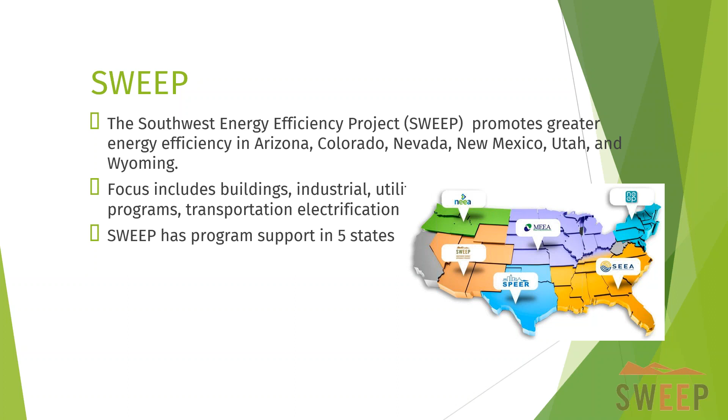We're one of 6 REEOs, Regional Energy Efficiency Organizations. There's one almost everywhere across the U.S. You can see a picture of where we're at. SWEEP's on the lower west to southwest side of that map.

So we're going to talk about these points in the 2021 today, and each of these could have their own webinar—a full hour, if not more, for some of these topics. Like the ERI—there was just one from ResNet, and Ryan Meres at RESNET just had a webinar discussing the ERI in the 2021. So there will be ongoing webinars from all kinds of different sources and industry as the 2021 code gets closer to being released.

Okay, we're going to start with the envelope changes. This is the 2018 prescriptive table. And I'm showing this prescriptive table—we know there's other pathways. This is just the R-value table, if you think of it that way.

It's easy for us to think of an R20 or R13 versus looking at a U value number. So I'm not going to show that table, but it aligns with the R value table. Then there's the performance path that uses the table, and the ERI has its own pathway, but it looks at this table to verify it reaches a certain level of efficiency. So this is the 2018 code.

I'm going to show you the 2021 version. What happened in a lot of the code change proposals, as Mike said, I was on the committee, and there were over 300 proposals that came through to add clarity, to make the code easier to comply with from both the builder, the trade, and the building official.

So a lot of clarifying language. In the second bullet, in the prescriptive table, we had a 13 plus 5. If we look at climate zone 3, where Las Vegas and Clark County are located, we had a 13 plus 5 in the wood frame wall. In the new code, it'll just be 13 and 5, since there was confusion about the plus sign.

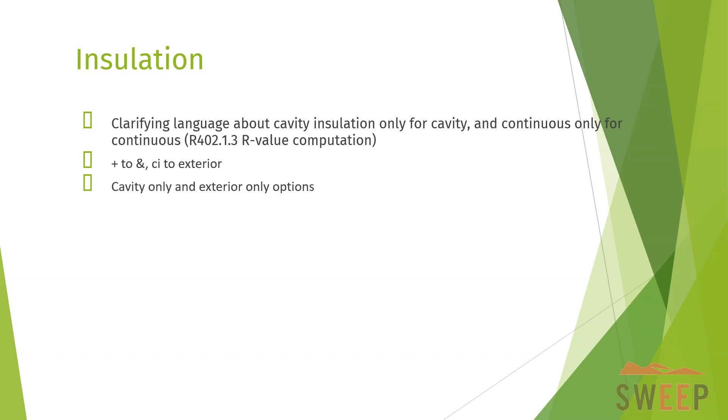For that 5, there'll be a CI acronym, meaning continuous insulation. That acronym's been used for years in the commercial energy code. There are also other options for cavity-only and exterior-only insulation, depending on the climate zone.

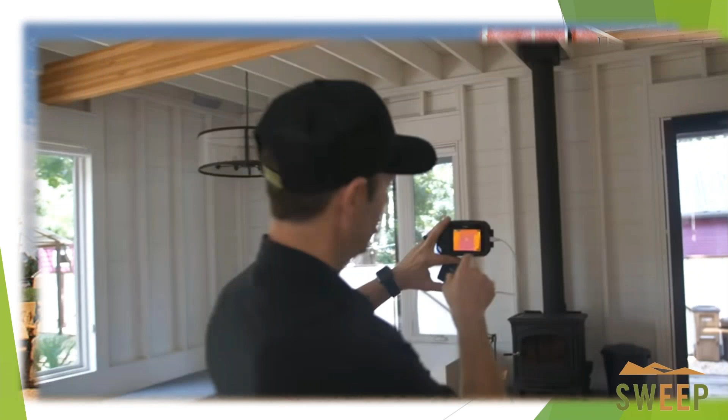Here I took a screen capture from Matt Risinger's YouTube channel, showing a house that meets the energy code with all insulation on the exterior. It could have been built that way in past codes using the trade-off approach, the ERI, or the performance path.

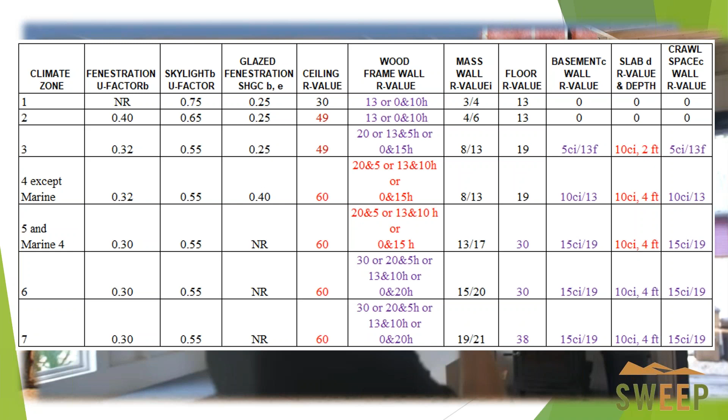In the floor value, those values were in the last code. What happened here is there was a footnote in climate zone 5, 6, and 7 that said if you could not fit that insulation value for the floor within that cavity, you could use an R19. The proposal was submitted to strike that footnote, and through the online governmental vote, it was supported and removed. Again, this is preliminary, but we think this is very close to what it will look like. That's what the change was in the floor values.

I'll just pass this, we already talked about ceiling insulation. So on windows, there were some changes there. Fenestration numbers came down to a 0.30 from a 0.32. We were at 0.32 in the 2018 code.

The proponents that submitted these proposals listed the penetration of the window products that are available, and it showed that these fenestration U values of 0.30 are definitely doable.

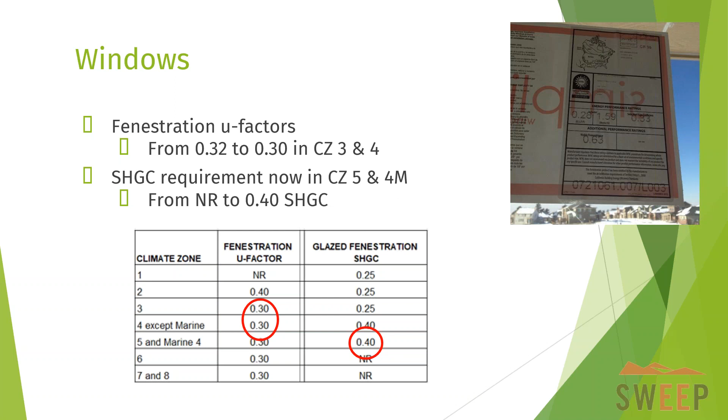As the U factor comes down, the solar heat gain coefficient has been coming down too, so that's not an issue. I reside in climate zone 5, the Denver market, and we're seeing below 0.40 SHGC on standard windows going into residential.

Next, there's the area weighted average that comes up for windows, and this comes into play if there is the trade-off pathway. Think of Res Check, or the performance pathway, or the ERI pathway — on this one it's just the performance pathway. What it was, the maximum U factors were higher, so you could trade and get your average maximum U factor higher.

In this code, 2021, it would be dropping them. Climate zone 4 and 5 dropped down to a 0.40 — it was a 0.48 for that weighted average maximum value. Climate zone 6 through 8 was a 0.40. So that's where they came down, where the efficiency in this code change proposal came in and was approved by the online governmental vote.

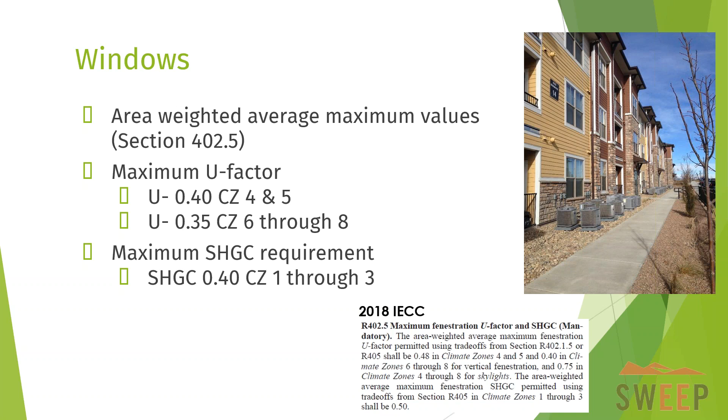And then SHGC also has a maximum weighted average, and that came down. It used to be 0.50 in the 2018 code, so that's come down to 0.40.

Other changes that happen with fenestration in windows is there are some changes if you're at elevation, above 4,000 feet. I'm in Denver, Mile High City, over 5,000 feet. What happens is you don't then have to align with the prescriptive 0.30 value — you can go up to the 0.32, which aligns with 2018. That's for elevation. So there are some climates at the same climate zone as Denver, but not at that elevation, which would be required for the 0.30 prescriptively, while climates above 4,000 foot elevation would be able to move to the 0.32.

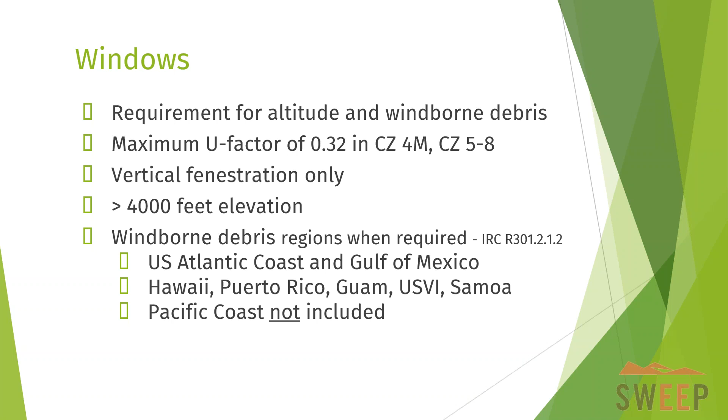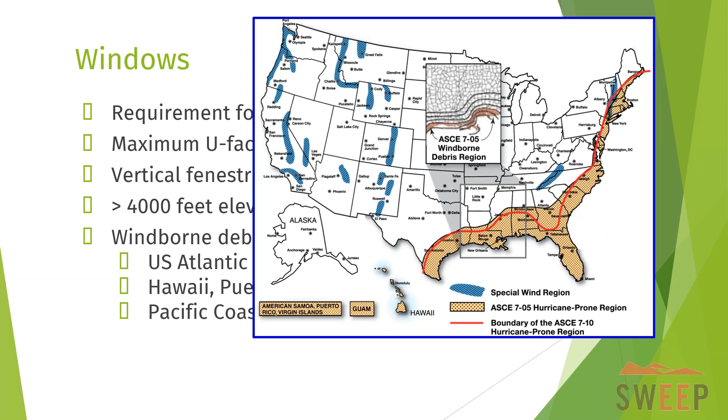Also the islands, whether in the Caribbean or the Pacific, those also fall under the hurricane-prone region. So this is a new addition to the code, and it provides the opportunity for windows to be installed — usually around windows being able to support the hurricane requirements or wind requirements that are more challenged with the lower U factors.

Air barrier and testing is the next item we're going to talk about today. There were many proposed changes to this table. This table came into the code in the 2009 IECC, after the Energy Star thermal bypass checklist that had come out a few years before. So it's somewhat of a checklist, and about 80% of the proposals were submitted by energy raters.

The energy raters presented this as being used as a checklist, a guide. The committee was saying the code is not a guide, the code is not a checklist, but this table is providing clarification and guidance, and the raters are using this as guidance, and the trades are learning of their requirements from this table.

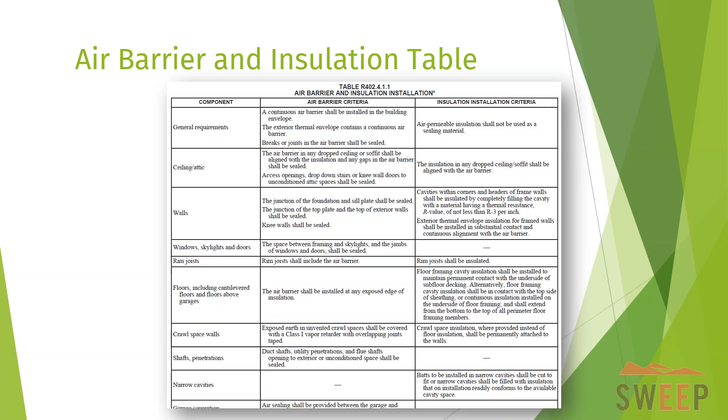So not major changes from an efficiency or technical perspective, but clarifying this table for use by the industry. Here's an example, just some simple, struck out a sentence that was redundant under the air barrier for general requirements. And then here's another example.

There was no air barrier criteria for plumbing, but this was an area where the raters thought there should be information: holes created by wiring, plumbing, or other obstructions need to be air sealed. The committee and the online governmental vote supported it. There's also, on the right side of that table, the insulation requirement. There was no requirement there, or they modified the requirement for plumbing and wiring to align with their air sealing.

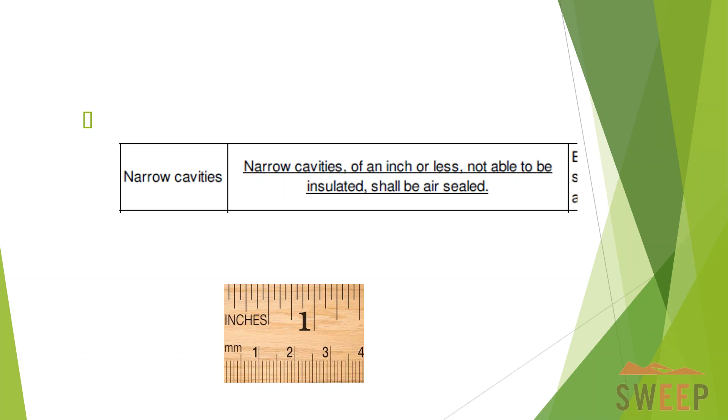So it adds criteria, but it's really there for clarity. I'll just go through some of these pictures. Here's one always question: narrow cavities. This was added for narrow cavities. If you have a narrow cavity of 1 inch or less, and you're not able to insulate, you air seal it. Think about the cavities around the windows, that's really where it's going to be. And that was supported by the committee and everybody that came through after that.

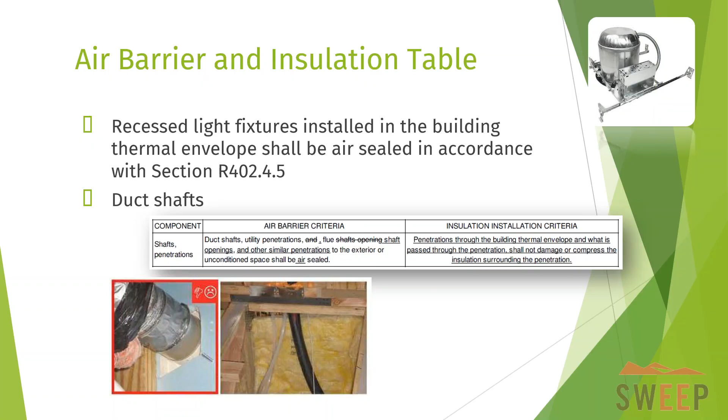Ongoing with this table, I'm just showing you some high-level ones: air barrier for duct shafts and recessed lighting, adding clarity. When the final version comes out, take a look at the table, see what was added. In the code, you'll see the change bars on the right side. Take a look and see where the change bars are located and see what's now in the code. The underline is the language that was added, and the strike through is the language currently in the code being stricken. That's how the proposal looks, and that's how the committee received and reviewed it.

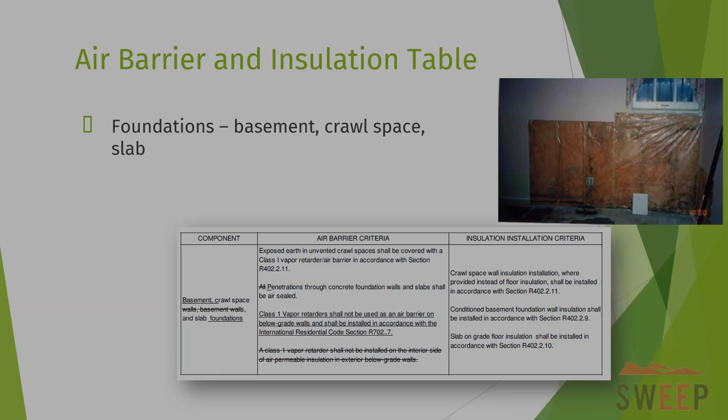The other big one is leakage. We had the insulation, and we just talked about the air barrier and insulation table. This is a new one: leakage. There's a number of changes here, and I think everybody is going to like them.

The builders and the raters appreciated what's coming into the code. There's a new definition: dwelling unit enclosure area. The reason for this is because of attached units, whether they're attached townhomes or stacked. There's been a challenge to reach the air change per hour requirements in the air leakage testing area of the code, and dwelling unit enclosure area fits for those attached units, especially stacked units. That's in the definition.

Then on the air leakage side, for these kinds of units, you're going to be able to use this other acceptable pathway. You can still use ACH, but this is an acceptable alternative. Now the air leakage can be measured at CFM per square foot, which aligns with the dwelling unit enclosure area - your ceilings, floors, and walls. And now you just have to be better than 0.30 CFM per square foot.

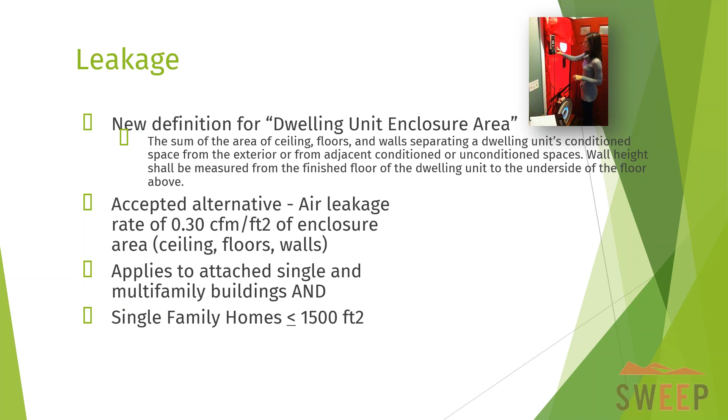It applies to stacked, attached units, and it also applies to single family detached. The rating community and builders have said this is a challenge when building smaller units to hit those numbers because the volume's not there, and the greater the volume in a home, the easier it is to get to the ACH numbers. So small, detached, single family also qualifies. This is a conditioned area.

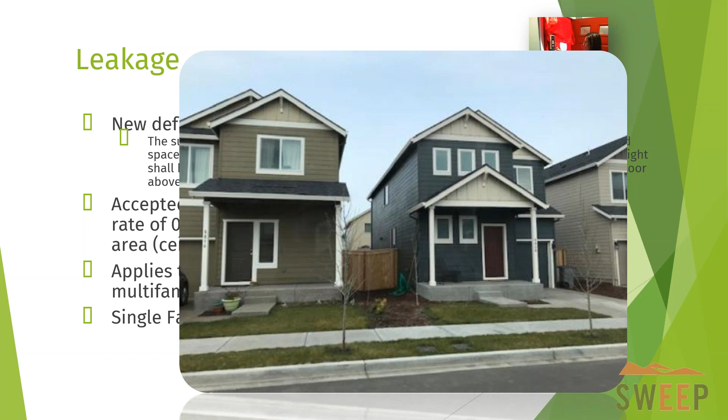Okay, and then we continue on multifamily. So over the years, the RESNET Multifamily Committee has been working on the challenges of testing multifamily and complying with RESNET with multifamily. Committee members from that committee were very active in participating and proposing changes to the 2021 code. And so now with multifamily, some of that has moved in, and this could be a whole other webinar just on multifamily and the leakage in multifamily, because there's a lot of great information. So it's really multi-zone testing, single zone. There's a lot of opportunities that are there that weren't in the code before.

And then, of course, you have your individual dwelling units with the multifamily. The other thing I wanted to mention is, it might seem minor, but the numeric ACH, the way the code has been written, it said 3 ACH, 5 ACH, but it was spelled out as a word. So there was interpretation of what that meant. If a report came back at 3.2 numerically, was that a 3? If it came back at 5.2, was that a 5? And so the code now says 3 is 3.0, 5 is 5.0. So going from a word to a numeric, that's a change. That should add clarity.

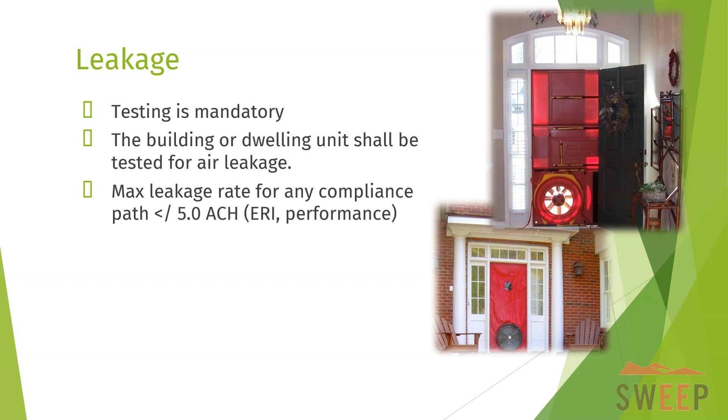Ongoing with leakage, testing has been mandatory in the code now for a couple cycles, so the building or dwelling units shall be tested for air leakage. That's now in the code, dwelling units. And what was not in the code before is if you did a different pathway, if you did an ERI or a performance pathway, there wasn't a limit on what leakage you could have in that residential unit. Now it says 5 ACH or less is the max air leakage you could have to qualify for the code with the ERI pathway or the performance pathway. Prescriptive, you're going to fall under the other ACH we just showed in the previous slide. But with these two pathways, you now have to max out at 5 ACH for the software to come back and say, yep, it met the code, either ERI or performance.

Okay, so system changes. We'll jump into the system, starting with duct testing, which kind of leads up to leakage. Like I was just mentioning, there wasn't a limit on air leakage if you used the two performance pathways. Well, now it's similar - you shall not exceed 8.0 CFM. No matter what other pathway you're using, that's your limit for duct leakage.

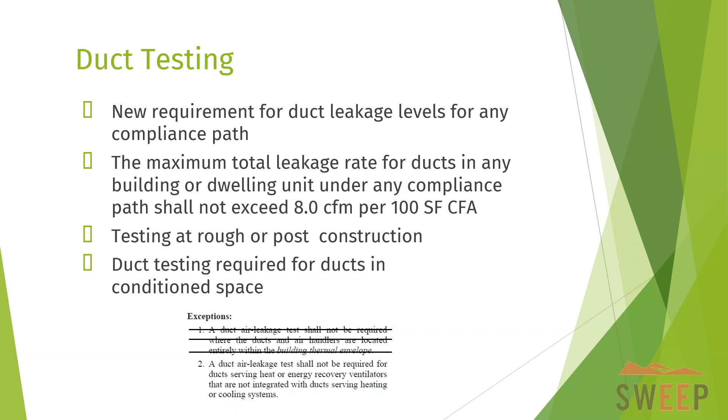Testing still occurs at rough-in or post-construction. The one change that has come in, and probably a controversy when the 2021 code comes around for adoption, is this exception. Exception 1 in the 2018 code and the 2015 code exempted duct leakage testing for ducts that were in conditioned space. With that exception being removed, now duct testing is required in conditioned space. Exception number 2 becomes exception number 1, but it's not in a specific section of the code - it's just the exception is deleted. So the interpretation, because it says ducts shall be tested, now ducts are required to be tested in conditioned space.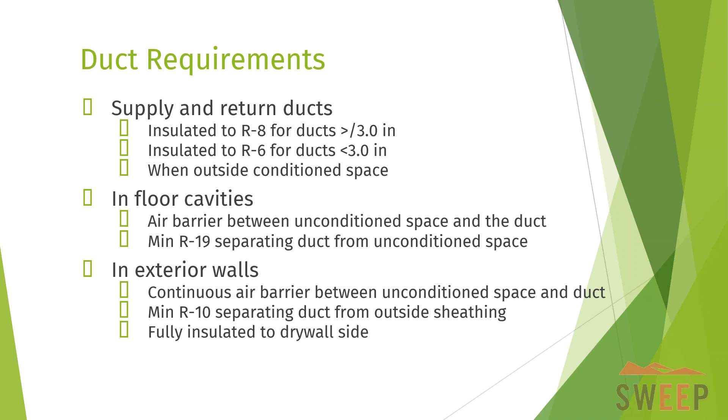Okay, so then we'll continue on with ducts. They've got different insulation values depending upon the duct size. When they're outside conditioned space, there's some new requirements that came in for floors and walls. Here's an example I pulled from the proponent's reason statement. In this example, you have to have the air barrier between the unconditioned space and the duct, and you have to have a separation, at least R19, between that duct and the unconditioned space. So that's something that'll need to be addressed in floor cavities.

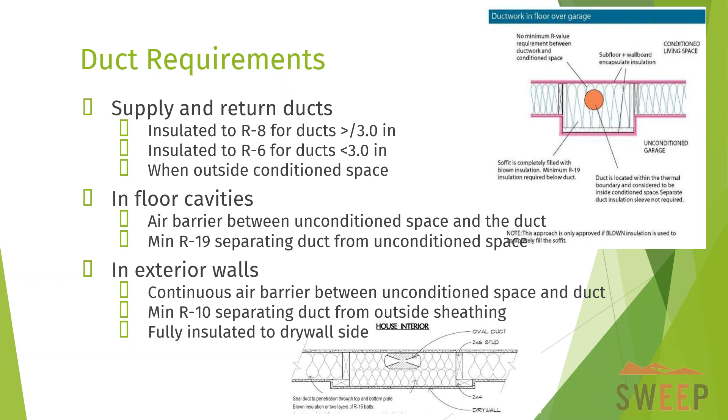I've seen this for years here in the Denver market where I'm located, where builders, where ducts are going in floors above garages, they're framing down and increasing that duct insulation between the air barrier, the drywall, and the duct. And so that's now in the code, will be in the code. For exterior walls, it's similar - you're going to have your air barrier between your unconditioned space and your duct, and then you have to have a minimum of R10 between your duct and your outside sheathing. So those are new requirements in the 2021 that weren't there in the past. The building science industry has talked about this for years, having enough insulation on the outside between the conditioned space and the unconditioned space and the ducts, but now it's in the code for 2021.

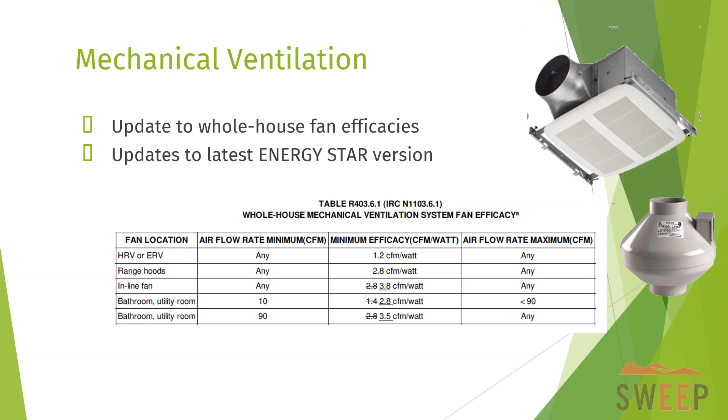Also, this is a new addition to that table I was just showing, for when the air handler is being used with the HVAC equipment. Now there's a minimum efficacy requirement that will be listed in the table, which wasn't there in the past, in addition to the other fan types.

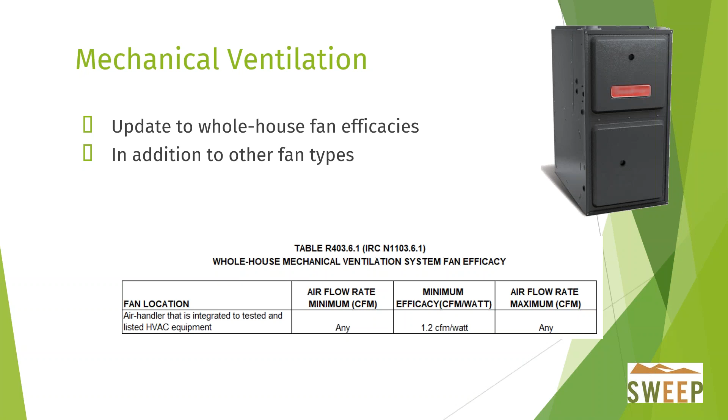Continuing with mechanical ventilation, in climate zones 7 and 8, an ERV or HRV is required. Not in the warmer climates, just in the cold climates of 7 and 8. It must be balanced, and it has a sensible heat recovery efficiency requirement for the units.

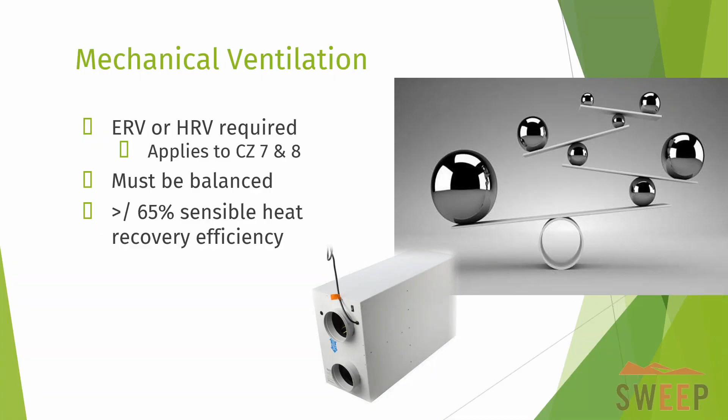Continuing with mechanical ventilation, there's some additional information in the code about testing, and like other sections of the code, it will list examples of air barriers and sealing. This is talking about ventilation and flow rates using a flow hood, a box, a flow grid, and so forth. That's new. The last bullet talks about a written report being submitted to the building official.

The commercial code has had commissioning in it for 4 cycles now since 2012, and they've had to submit a commissioning report to the building official. That's all they had to do. They didn't have to have it approved, and they didn't have to go through any specific review, just submit it.

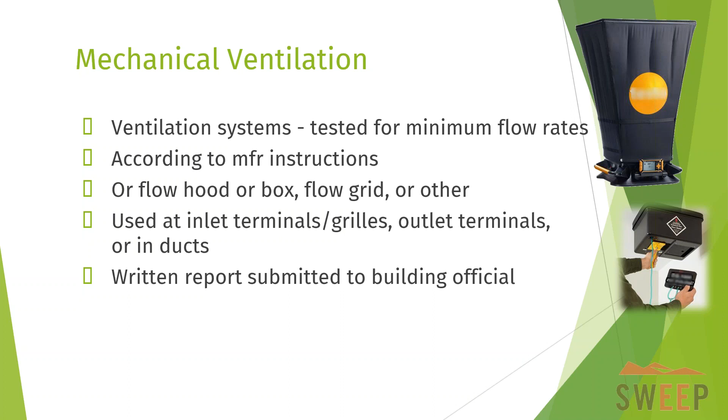This is similar. I would imagine there could be some interpretation at local levels, local municipalities, but just the written report needs to be submitted to the building official. It doesn't say it has to be approved, so that'll be new to the code. I don't think anybody is really pushing back on that with the appeal Mike mentioned earlier at the beginning of the webinar.

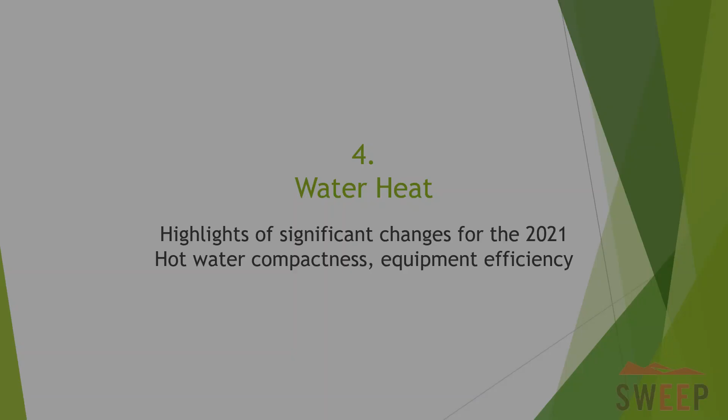So, water heat. There are some new requirements in the code, and first I'm going to talk about compactness of hot water. You're saying, what on earth is compactness of hot water? Well, this is a calculation done in software, and it aligns with ERI, though it's not identical to what's in the ERI.

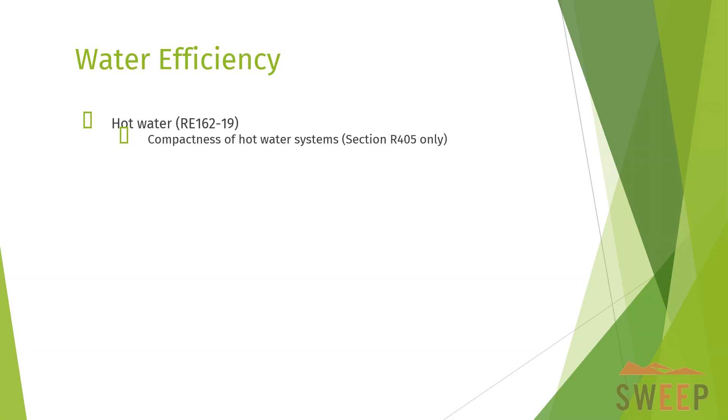Looking at the hot water systems, it examines the hot water area by area in that conditioned space, looking at wet rooms, faucets, and so forth, and where the hot water heater is located. This only applies to the performance path, that's R405, not prescriptive, not REScheck, not UA trade-off, not ERI, but the 405 pathway.

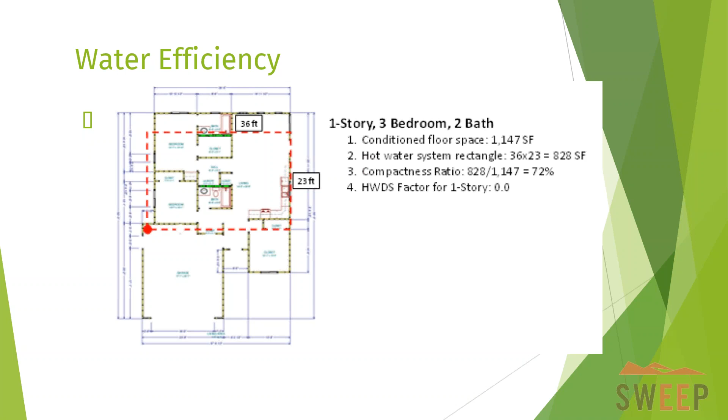This goes into the software to do the calculation, but this information needs to be put on the plan: what's the conditioned floor space, what is the hot water system, is it a rectangle? You're not going to have to do a triangle or rhombus, just a rectangle, and you're going to come up with a compactness ratio.

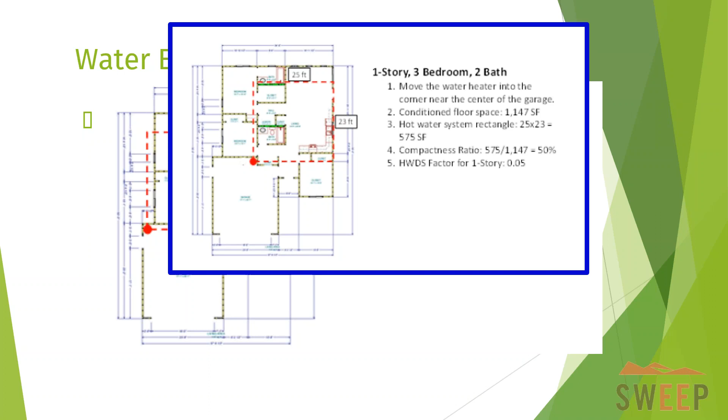But this information, going back to this diagram, needs to be on the plans. It shall be on the plans, and it's only for the performance path, R405, recognizing this is being done in ERI and HERS, in addition to the performance path, to gain efficiency in hot water. So it's looking at the sources, hot water heaters, loops, whatever. If you've got heat trace pipe, that would be part of that rectangle.

Any of your termination points, your faucets shown on the plans. If you have more than one water heater in a larger home, then you'd have 2 rectangles, because each water heater would be servicing a different plumbing source.

If the water heater is included in the basement, that's counted. So going back to the table, you're going to get your compact ratio, and it's going to be even smaller because you'll have more area with the basement. But this hot water distribution system factor will go into the software, so the rater doing the performance path would have to enter that information, and the software would then calculate it.

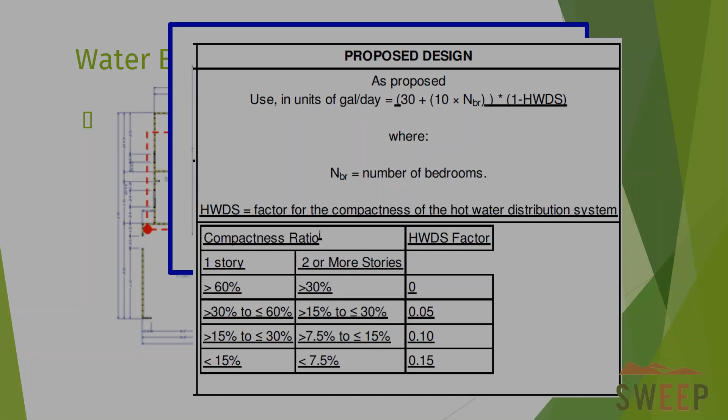This is part of the code. Next thing is water heat, and this is prescriptive. This came into the code - I don't remember if the committee voted this unanimously or whether it failed just barely, but it went through the rest of the voting process. The online governmental vote of ICC members did approve this, and this is for the prescriptive pathway.

Any of these can be chosen. There's not a conflict with the NAECA requirements for efficiency - it's not going beyond NAECA, because they can choose any of these. So you're not limited to a tankless system or electric water heat. You have multiple options that you could choose from.

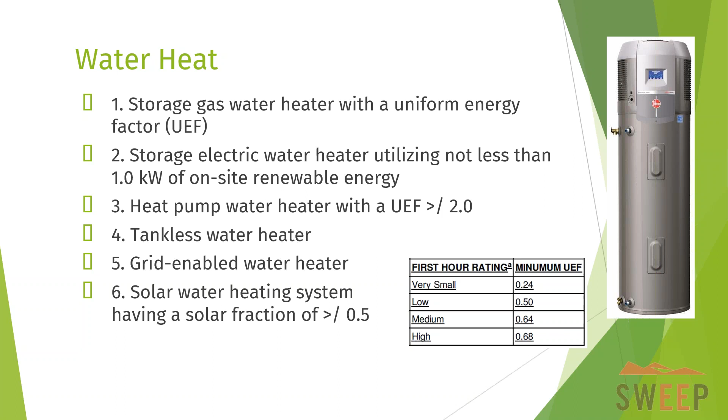Solar - on items 5 and 6, there's new definitions being added to the code for grid enabled. What is that? So solar fraction, what is that? That's new definitions that'll be added to the code describing those, and that's prescriptive. Jumping into lighting, I'm going to move a little quicker.

So lighting controls and efficacy. On the efficacy, the values that are in the 2018 Energy Code came into the code in 2009, so it hadn't been updated in years. In the 2009 code, it had a different lumens per watt based on the size of the bulb - whether it was greater than 40 watts, or 15 to 40 watts, and so forth.

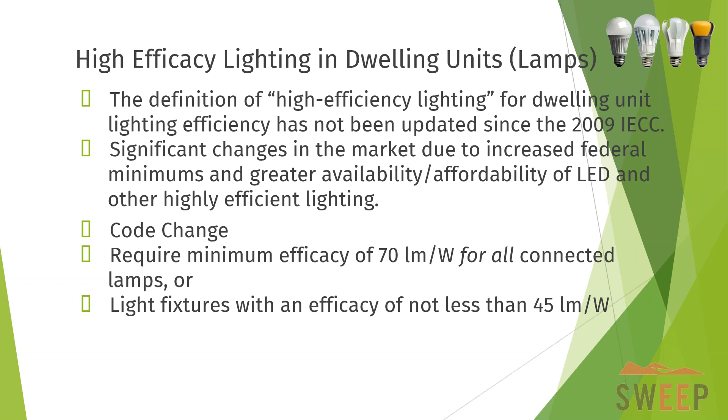This is for, yeah, and so it aligns with the federal minimums that have been going up, and states have been increasing their requirements.

Also, controls. Controls have been in the commercial code for many cycles, and now some controls are being added to residential. So a dimmer is considered a control, occupancy sensors considered a control. Other controls could be used - the industry is always coming out with something new, so it leaves that flexibility for other.

You have exceptions there, bathrooms and hallways. You don't want an occupancy sensor going off when you're in the bathroom, definitely not in commercial restrooms. So safety and security always trump the energy code, and so any lighting for safety and security is exempted.

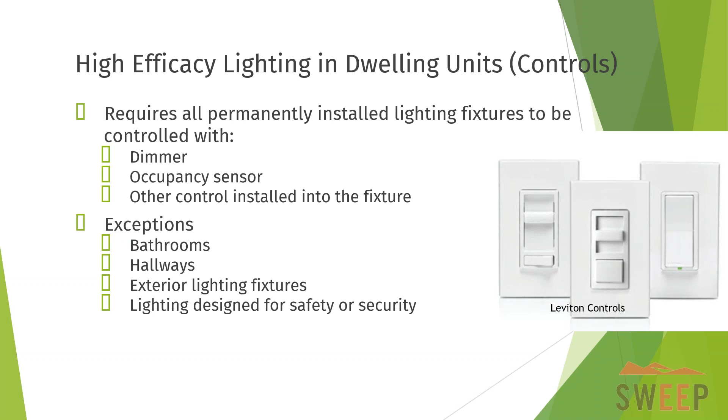So where it will come into play is multifamily residential. This picture here, 3 stories - this building, the energy code complies with the residential energy code. If it was 4 stories, it would have needed to comply with the commercial energy code. The commercial energy code already has all the lighting requirements and the exterior lighting requirements, but on the residential side, it didn't.

Now there are requirements in the codes for safety, and those have been there in the exterior lighting requirements, but from an efficiency perspective, they've not been there. So these are new - maximum watts per square foot, lighting controls, with 1 to 2 family dwellings as an exception. It has a max wattage, and you're really not going to hit that wattage unless maybe you have a 7,000 square foot single family home. On a typical single family home or attached townhouse, you're not going to hit those levels, so the exterior lighting requirements are really going to apply for this type of building - multifamily, 3 stories or less.

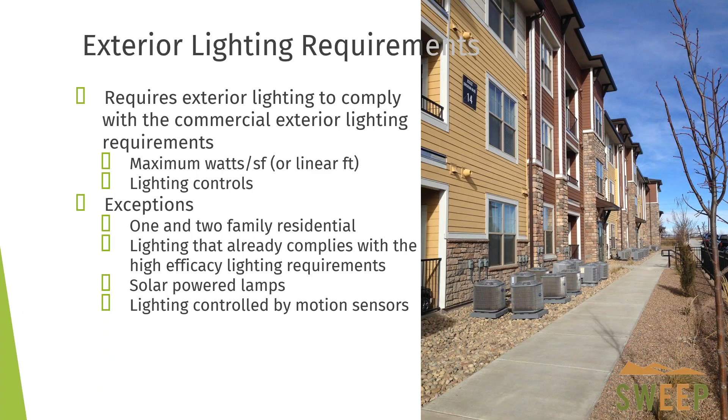Okay, electric vehicles. I'm watching my time, I'm moving.

Electric vehicles - so over the last 3 years, from coast to coast, we've seen municipalities adding requirements for electric vehicle infrastructure into the building codes, as the electric vehicle industry is growing, and the primary place for charging is overnight at one's residence.

This only applies to new construction. There are cities - Atlanta, of course the West Coast, and here in the Denver market, Denver brought in requirements 3 years ago. But at that time it was just the infrastructure - you either put in a wire or a conduit. So builders have been putting in conduits for the last few years.

Denver, with the 2018 code they just adopted, took language from the 2021 code and moved it into their 2018 code. So for 1 and 2 family dwellings and townhomes - residential - you must have an EV-ready space. There's a definition for EV-ready space.

You're going to be wired, you're going to be at your panel, and you're going to have an outlet at your parking space. That's an EV-ready space - it's ready for the EV.

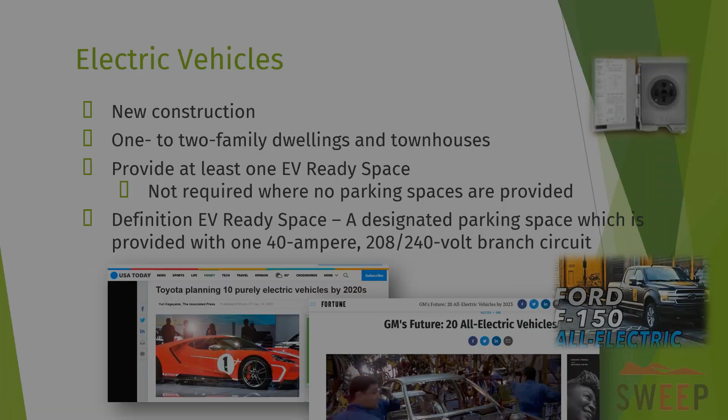This also applies to multifamily new construction, and in that case there is a matrix. You'll see this matrix over in the commercial side - the commercial committee approved it on the commercial code for the 2021 IECC.

I'm seeing communities in the Southwest where I work - Flagstaff, Sedona - small communities adding EV infrastructure and EV readiness requirements. It's pretty interesting to see what's happening in that space.

There's a new definition, EV capable - basically you've got your raceways or conduit. It's capable, you just have to then wire it, hook it to the panel, have your outlet, and so forth. So there's ready and there's capable, with different requirements for EV ready and EV capable. That's in multifamily.

So, doing good on time - I'm talking fast and my voice is holding out.

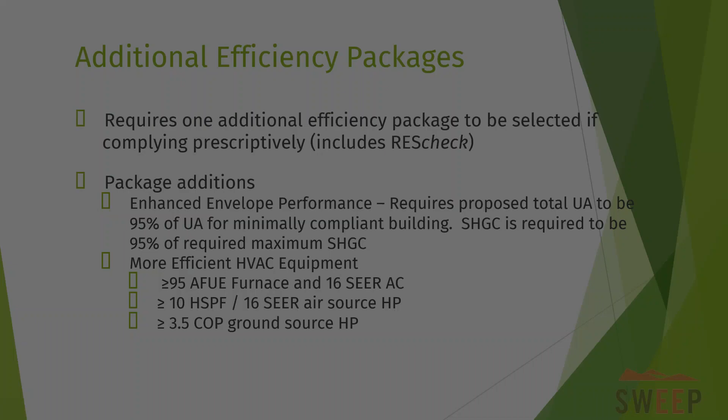Efficiency packages - I'm going to talk again about the commercial code, and I know they're not the same. A single family residential, condominium, or townhouse is different than an office building, lodging structure, or retail building. They are different. But on the commercial side, they've had additional efficiency packages for years, in section C406 of the commercial code.

The commercial code says you do these things - you could do the performance path, the prescriptive path, or your trade-off path - and you choose an efficiency package. One of these options, you choose that.

There were a number of proposals that came in, and one was approved through the online governmental vote. I believe this was NBI's, New Buildings Institute's, proposal that came through. If it wasn't, I apologize, but I think it was this one.

They have additional efficiency packages - again, you're going to do the code requirements, and then you're going to choose from this list. A couple people have called these the flex packages, but it's additional efficiency packages.

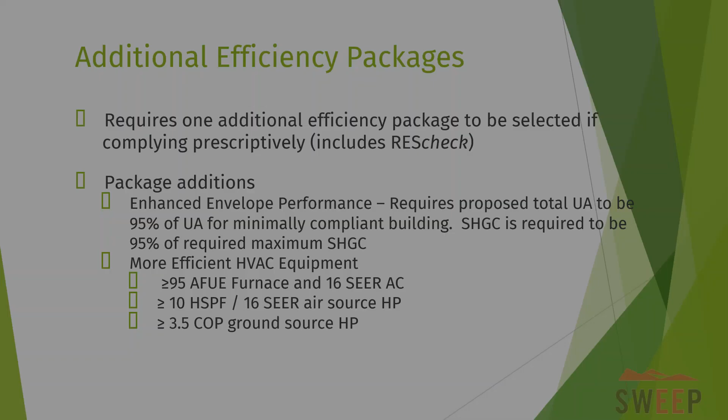Your water heating is another one you can look at. Then your duct systems - where are your ducts and air handlers? Are they all in conditioned space? You get credit for that.

If you're going to go low on your air sealing, then you're going to have an ERV or HRV.

Now, there's one thing about this additional efficiency package - it's only recognizing ACH 50. So at the local level, there would have to be an amendment to say that if you were going to have an attached unit or small single family detached and use CFM 50, you'd have to have an equivalent type number. If you're below a certain level, that would need to be added. Otherwise, this additional efficiency package only qualifies if you're doing the ACH 50.

Another one, if you're using the performance pathway, the computer simulated, you have to be 95% of the standard reference design, so 5% below the standard reference, and you get to choose one of the additional packages.

If you're doing 406, which is the ERI pathway, you just have to be 5% less than the ERI targets. It's not going into any more detail on ERI other than just 5% less than the ERI targets.

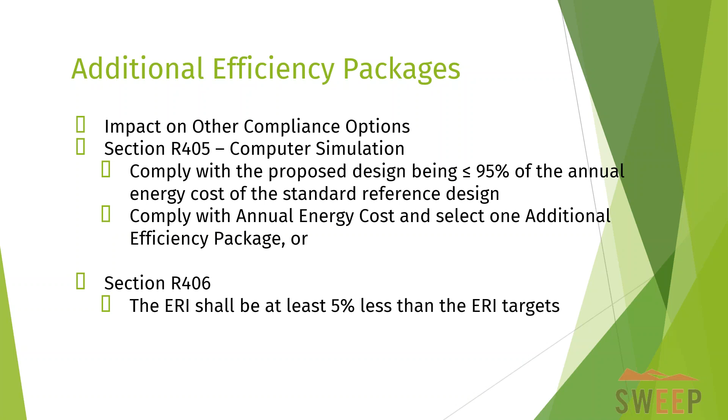Okay, now we're going to jump right into ERI. What I'm showing on the table to the right, the values that are struck through, those were the 2018 numbers. The values to the right that are underlined, those are the values that were approved in the 2021 code. Those numbers are also the same as what were in the 2015. So 2015 IECC is when the ERI came into the code. 2018 raised those ERI index scores, and then the 2021 has brought those scores back down to the 2015 levels.

The ERI, there was also confusion with it. It had two backstops in there. It said, using the ERI pathway, you just have to make sure that your building enclosure, your envelope, meets at least the 2009 IECC envelope requirements. And if you were using solar, it would have to meet at least the 2015 envelope requirements. So that's all been removed. That was confusing. Again, clarifying, adding clarity to the code.

Now what's done is it adds just a UA based on the 2021 IECC, which we've been talking about with that table earlier. And so it's 15% - you can go 15% less than that table, and it doesn't matter where. It's all UA. It could be anywhere within that UA calculation.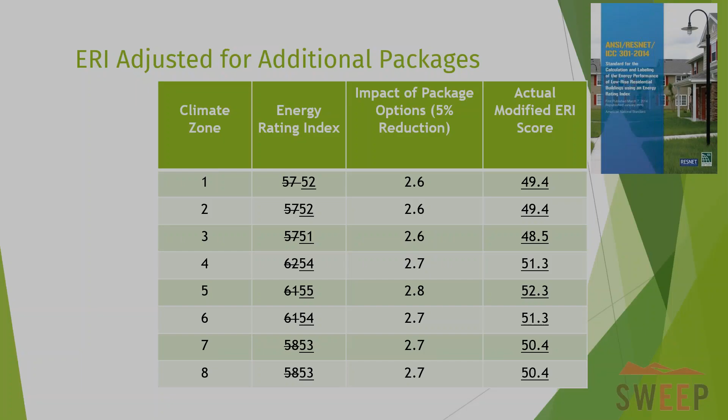Okay, next one is the RECs. Boy, I'm going faster than I thought. Let me go back.

Okay, RECs, renewable energy credits. This came into the code on the committee. I was actually an opponent to this. Didn't want to see it come into the code. Not that I don't believe in RECs, but I felt that I'm not sure how this is going to be enforced, how the building department is going to verify RECs, and all of the industry bringing that information forward to the building official to know about RECs and where the RECs are retired and so forth. The REC represents the environmental attributes of a megawatt hour of renewable energy.

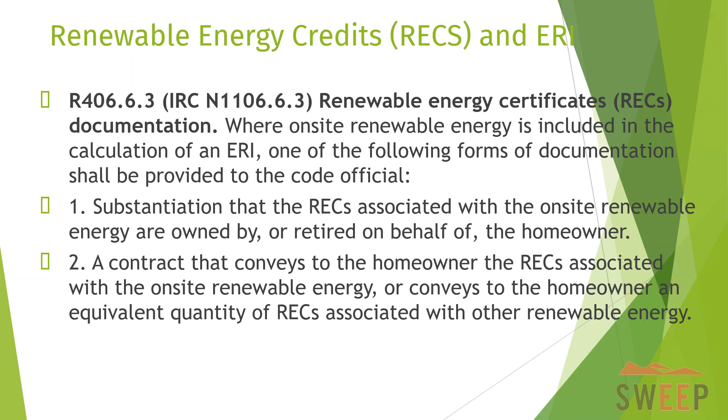And so RECs, there's values to RECs. They could be sold, they could be traded. There's some values to RECs. And just because you buy a solar system and put it on your house doesn't mean you own the RECs. You have to find out upstream, did somebody else retain the RECs? On a PPA or lease, I think most people would know that they don't own it - they're just using the renewables on their structure. So that's RECs. It's in the code. Could be a little confusing.

Electrification ready, and I'm almost done. So electrification ready - this is also, I talked about the EVs and how that's happening across the country. Large and small cities are adding electric vehicle requirements to new buildings, residential and commercial. This is happening too, electrification ready. And so we're seeing it on the West Coast, we're seeing it in the Northeast, where communities are saying, well, we want to be able to support and go to 100% renewables, whether it's on site or off site, but renewable, which really means moving to electrification.

And so what this proposal says is if you put in a gas dryer, a gas range, a gas or propane water heater, then you also have to install an electric service at that appliance within 3 feet of that appliance.

And so that's what it's saying, have the capacity at the panel. There are a number of cities in California that have done this, so you can choose to put in this, or put in that. If you want to provide flexibility, you put gas and electric, and the buyer can choose. Or if you just want to go electric, that's electrification ready.

Closing up, zero energy. There's a zero energy appendix. That proposal came through and was approved.

And what this does is it addresses communities that want to go to zero. There are a number of communities across the country saying, I want to go to zero. They have climate plans, environmental plans in their communities, and they want to get to zero. So this was developed; the proponent who submitted it looked at the information from ASHRAE 90.2,

the Department of Energy's Zero Energy Ready Home program, and came up with these numbers. The middle column are ERI numbers without on-site power. That's where you need to start for your zero energy appendix. And again, this is an option - if a community adopts it, then it becomes a requirement. Your ERI rating index for zero is 0. So it's a fairly simple table.

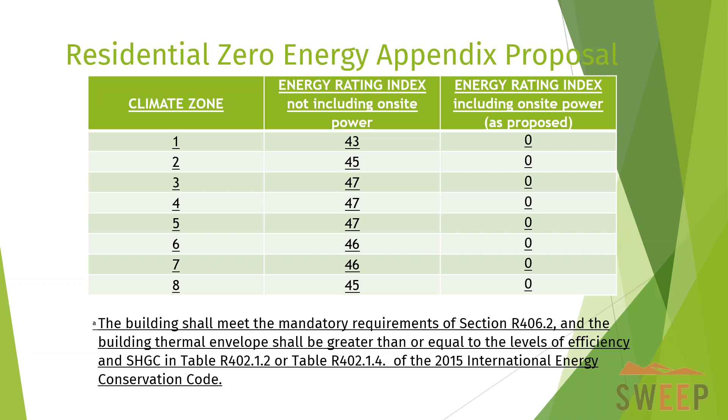One difference here with the appendix is that each proposal is submitted separately. Now proponents, the people submitting proposals, can coordinate with others, but many times they don't know what Mike is submitting, and they don't know what I'm submitting. So we might have proposals that are similar, or related, but have some differences. In this case, the backstop is the 2015 IECC, and as we talked about with the ERI, it's now a UA. So there is that difference.

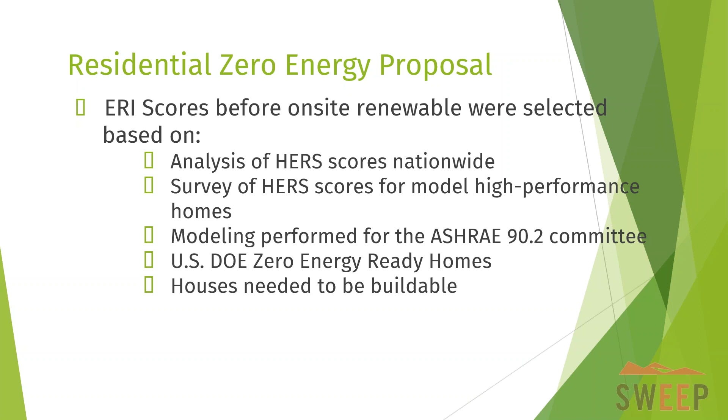And then I'm almost done. So the 90.2 committee did all the modeling. These numbers are in the 90.2 standard, which is a residential standard. They met all of the ASHRAE cost effectiveness tests and requirements, and that was submitted as part of the proposal.

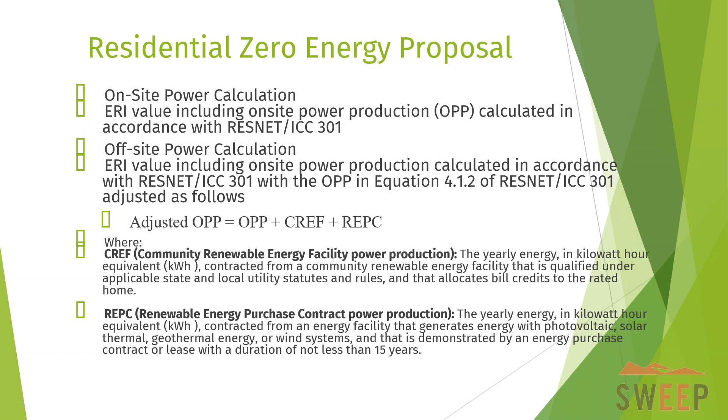Also within the zero energy proposal, off-site renewables can be used, not just on-site but off-site, to get to that zero score. There is a formula here - not going to go into it - but there's a formula if you're using off-site power, and that needs to be put in for off-site power to comply with the zero energy appendix.